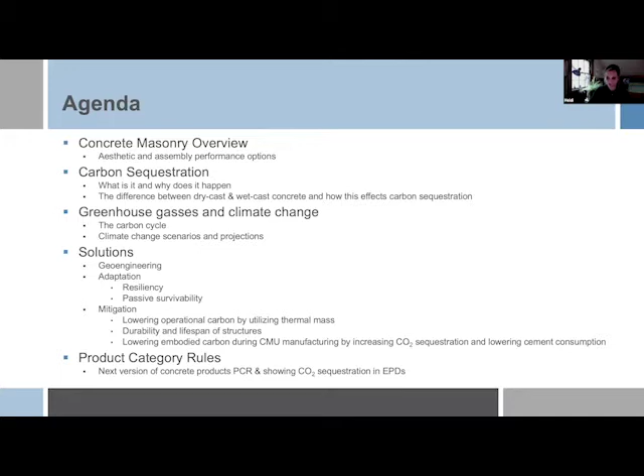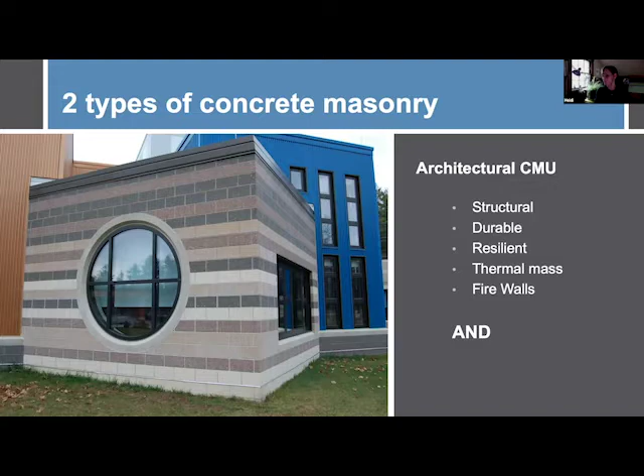For an overview, there are two types of concrete masonry units. We have gray block, which is structural, durable, resilient, has really good thermal mass, and is also used for firewalls. And we also have our architectural CMU, which is very durable. It can be structural or veneers. It's also very resilient, has good thermal mass, and can be used for firewalls. It's also very beautiful, and can be used for both structural and veneers.

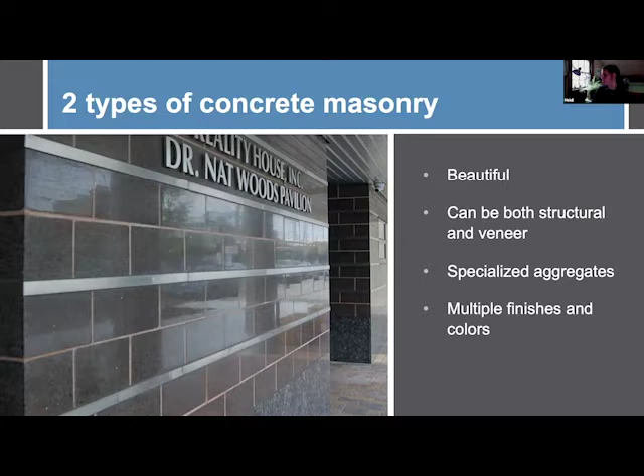We use a lot of specialized aggregates from all over the Northeast, and we have multiple finishes and colors available to us.

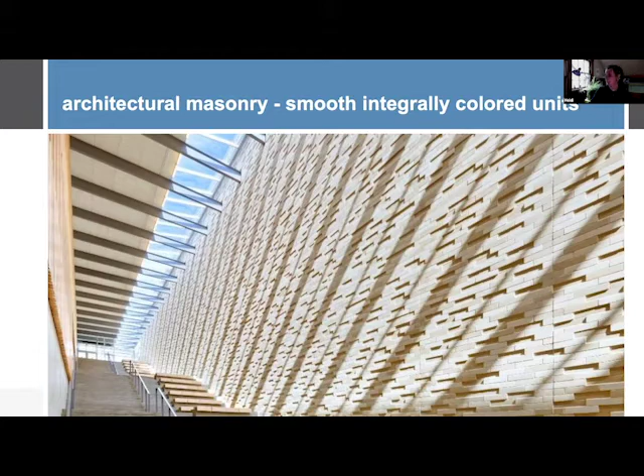And then we have a weathered or textured polished CMU, which is a similar process to polish, but it almost scoops out the concrete behind the aggregate and then shines up the aggregate, so it almost has a leathery kind of feel to it.

For our wall types, we have a multi-wythe cavity wall. This is usually an 8-inch block backup. We have room for insulation and then some sort of veneer. It can be, in this case, a smooth face CMU, but it can be brick, ground face, or polished.

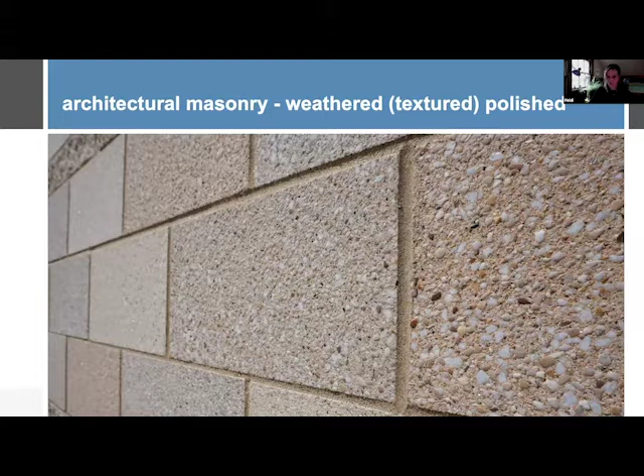Here we also have our pre-insulated single wythe wall. This is a single block unit, usually with a different type of shape. Like in this case, we have one web and the insulation inside the unit so that it conforms to current energy codes. On the right, we have our anchored veneer, which is usually a steel backup, and in this case we see a ground face veneer. We probably do about 60% of what we manufacture at our plant for this kind of wall structure, being the anchored veneer.

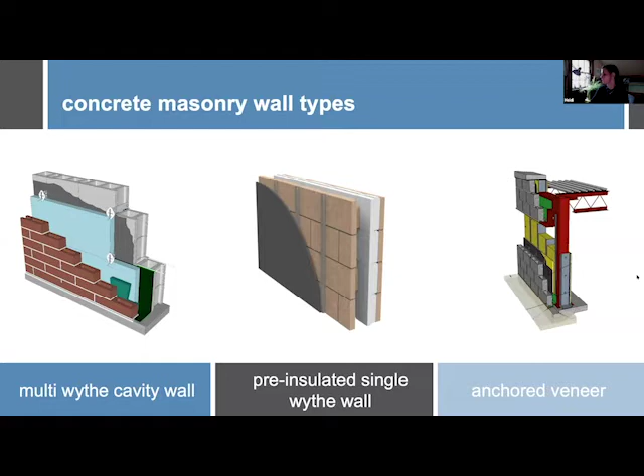So carbon sequestration, what is it and why does it happen? It's traditionally been called carbonation, which is well known within the industry. It's part of the reason that concrete gets hard, and part of the reason that concrete shrinks.

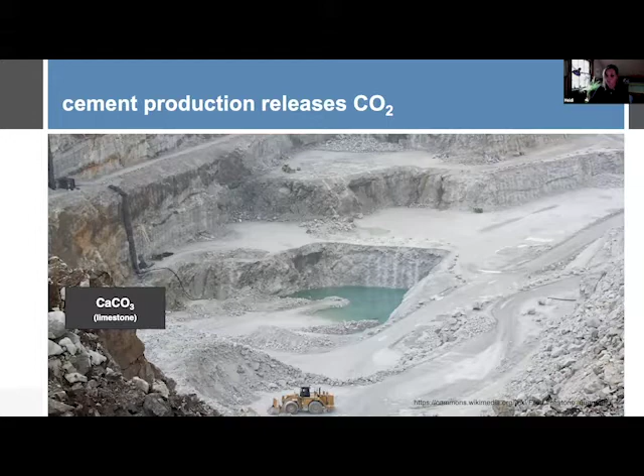So why does it happen? I'm going to go a little bit into cement production. When cement is being produced, CaCO3, which is limestone, is taken out of the quarry. It is heated up to about 2,000 degrees in this large rotary kiln. This heat causes a chemical reaction, and for quick and easy numbers, approximately 45% of the CO2 released for cement production is due to the energy used to heat up this limestone.

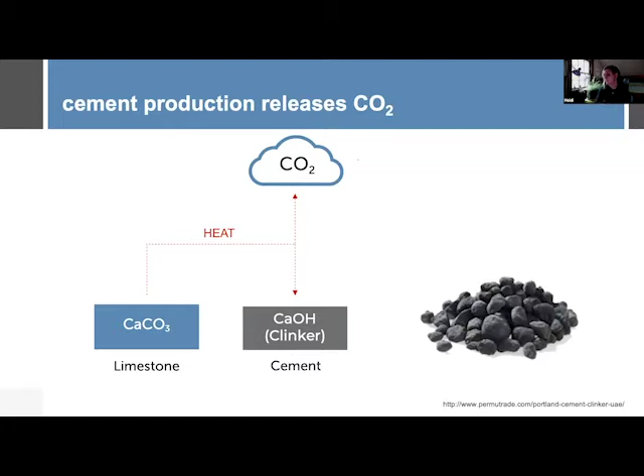So when the limestone is heated up, it breaks apart chemically and CO2 is released. What is left is our CaOH, which is also what was called clinker. This clinker is then ground up and powdered, and that is where our cement powder comes from.

But when water and aggregate are combined with the cement, it produces concrete. So from the moment concrete is produced, it begins to reverse the chemical reaction that originally released the CO2, and it begins to sequester CO2 from the environment. The sequestered CO2 is chemically combined permanently back into the matrix of the concrete as nanoparticles of limestone.

This has historically been called carbonation, like I mentioned, and about 40 to 50 years ago it was studied extensively due to corrosion issues with rebar in concrete, because as it carbonates, its pH decreases. So corrosion protection requirements for masonry and concrete have been figured out for the most part and are part of the building code requirements that haven't changed for about 50 years. But studying and researching carbonation, AKA carbon sequestration for environmental reasons, is fairly new territory within the industry.

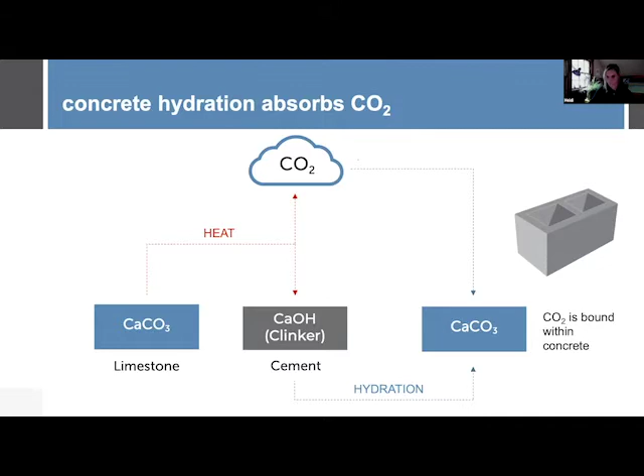So I'm going to go into some of the similarities between dry cast and wet cast concrete. The raw materials are basically the same, but with different ratios. Dry cast, which is what concrete masonry, concrete block is, generally uses a different gradation of aggregates. It uses less water and much less cement than wet cast concrete, which would be the same as ready mix or poured in place concrete.

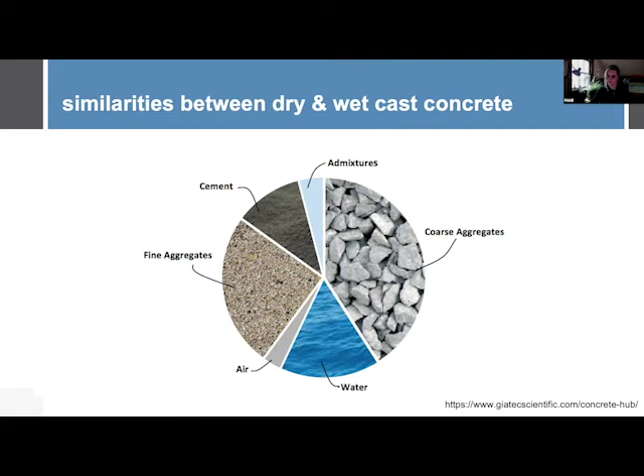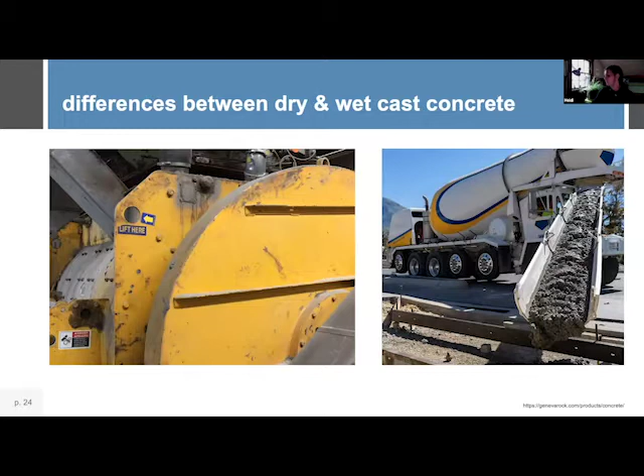So on the left we have a block machine, and this is our mixer. All of our raw materials are put into the mixer with a very, very small amount of water. On our right we have our poured-in-place mixer, so it all happens here and then it just gets poured right into the ground. That's kind of the end of it.

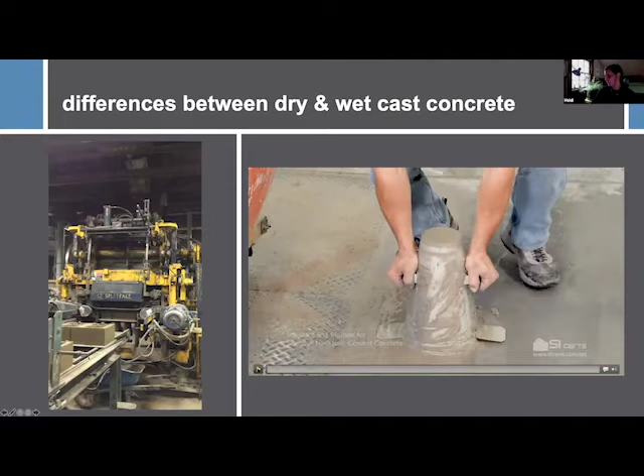Where dry cast, here I have a video of our block plant. Dry cast is also zero slump, so there's very little water in it. From the mixer, the concrete gets poured down into the machine, and it's actually vibrating. Once the block comes out, if I were to grab this, that's why we call it zero slump. The difference here is that slump concrete has got a lot of water content in it.

And that water content is very important for the strength also. So here's a little video of a slump concrete.

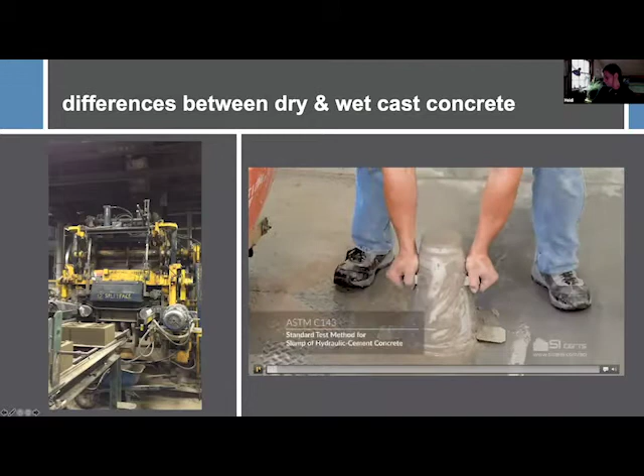We'll invert the cone, measure down to the offset center, and get your reading for your slump.

So because of this difference in slump and therefore water content, dry cast concrete has a unique structure that helps to facilitate accelerated CO2 sequestration when compared to poured-in-place concrete, which we're going to get to in a little bit.

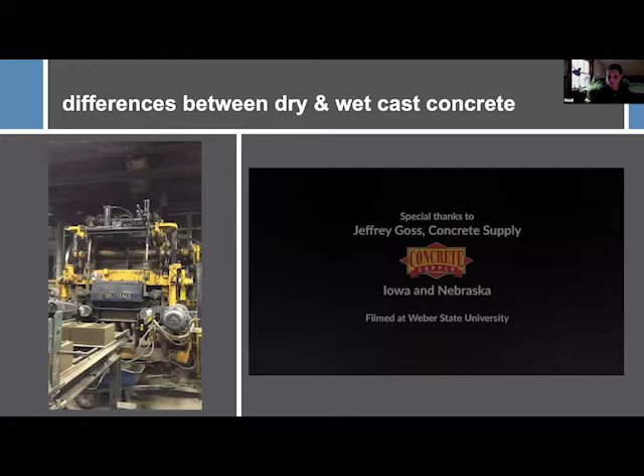Another one of the main differences between dry cast and wet cast is that we use a kiln. The kiln isn't all that hot, it's probably only about 140 degrees, depending on the mix. But essentially the reason for using this is to cure the concrete, to give it a jump start, starting the hydration process.

And that's another way that we gain our strength. The first way is with the vibration and compaction of the machine - that's one way we gain our strength, and also the curing. So dry cast is not completely dependent on cement content to gain our strength; there are other parts of the manufacturing process.

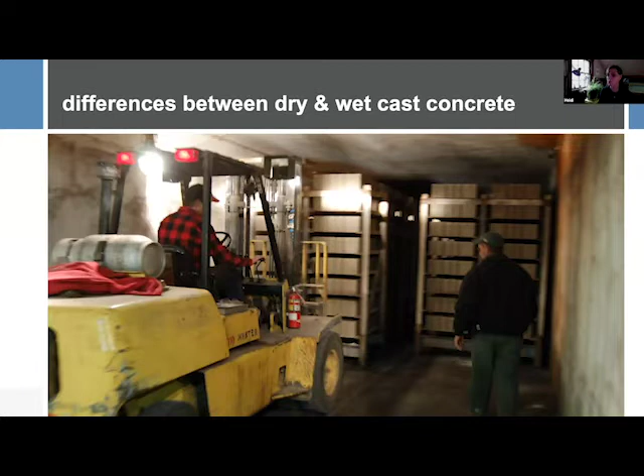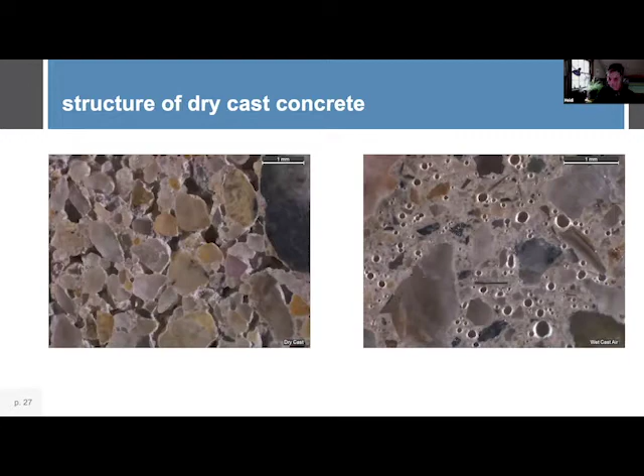So because of this structure of concrete block, ASTM C90 has absorption limits. If the block conforms to C90 and it's properly flashed, weeped, and has crack control detailed properly, moisture won't be an issue with concrete masonry construction.

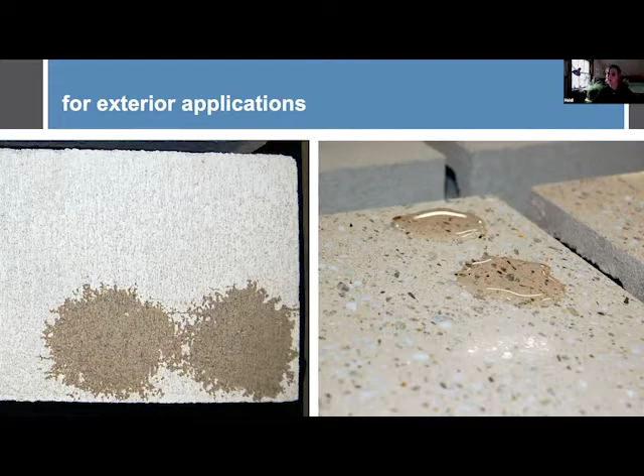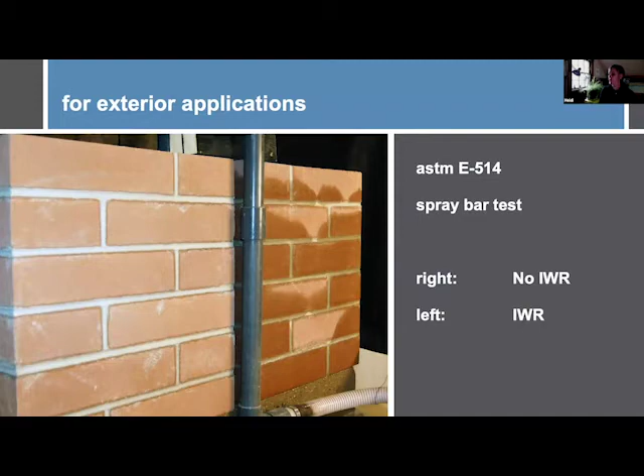Another test for water repellency is our ASTM E514, which is a spray bar test. The block on the right had no integral water repellent, and on the left it did, also in the mortar. You can see that over time, water starts seeping in if it doesn't have the integral water repellent.

So back to the void structure - because of the more porous structure of dry cast, we have to control water penetration with CMU construction. But all that surface area and void structure produces kind of like a carbon dioxide sponge.

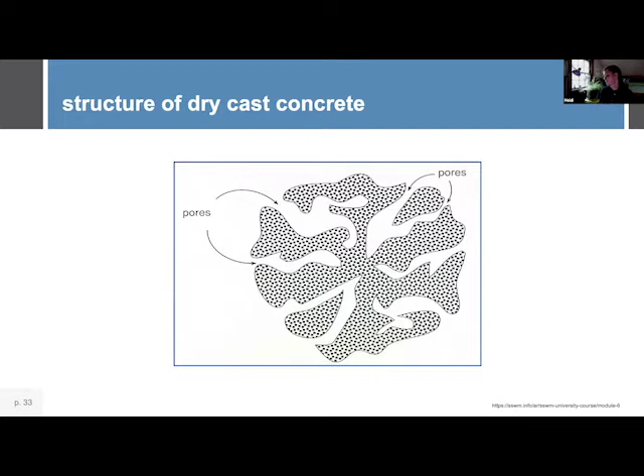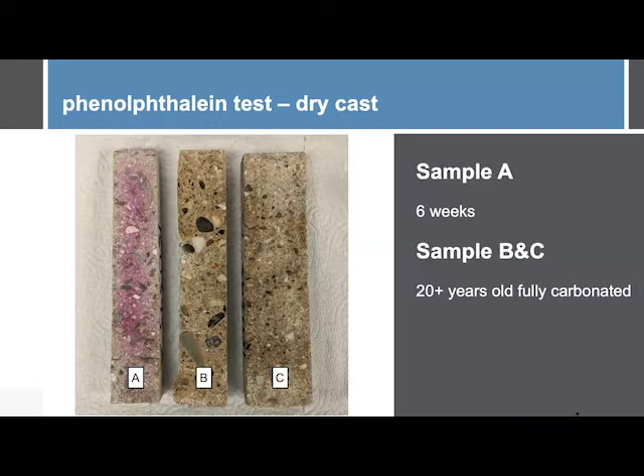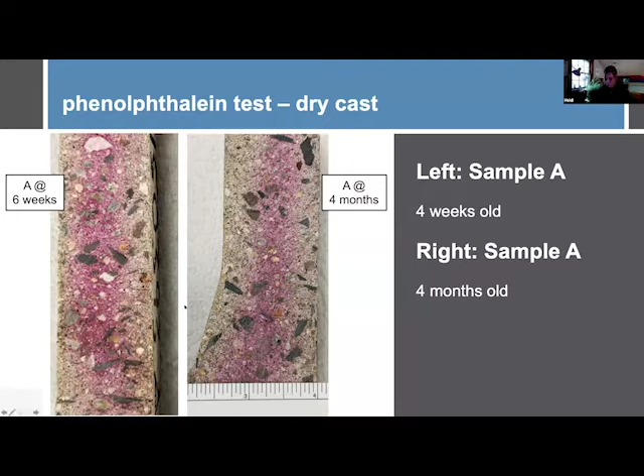So the sequestration potential, about 40... and these are very, very rough numbers. About 45% of CO2 emissions is due to the heating, 45% due to chemical reaction, and 10% to other processes of manufacturing.

The CO2 emissions due to heating and other processing can be improved with increased efficiencies. For example, Heidelberg Cement Company, in their 2019 sustainability report, reported a reduction in CO2 emissions by 22% since 1990, and they have a goal of 30%, so that's substantial.

So increased efficiency of the cement plants will help to shrink the CO2 emissions given off by the energy that it takes to make the cement. But the CO2 released due to the chemical breaking apart of limestone won't be affected by these efficiencies. However, we can potentially get a good portion of this back through sequestration and using technologies to increase sequestration rates.

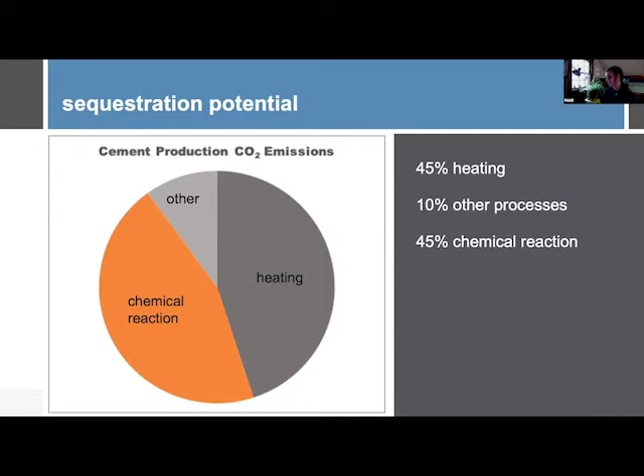Here we have this 20-plus-year-old block, and it was 25 to 28% sequestered CO2, which uses up another huge chunk of the potential.

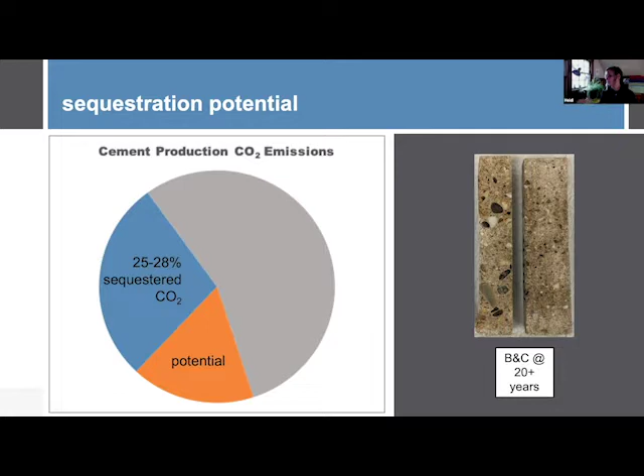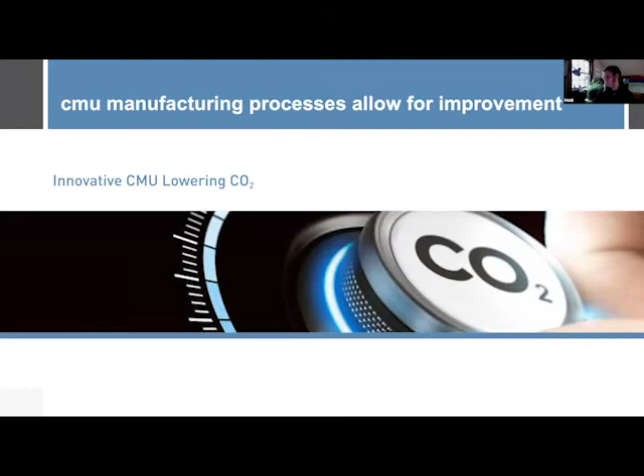So what about the remaining? How about that? This is another current area of study and research that we've been working on at our plant, how to get the most sequestration possible by changing the way we manufacture and our raw materials. Our first testing is at 28 days, but we're also looking beyond the 28 days. I'm going to talk a little bit about some of the manufacturing process improvements, but that'll be more further on. I will say that we have been researching technologies to increase the amount of CO2 sequestration at 28 days.

So why 28 days? Well, first of all, this would be considered cradle to gate for our EPDs, which are currently cradle to gate. And it's also when we no longer have control over what happens with the CMU. Is it covered with non-breathable paint? We don't know. Covered with insulation? Probably. Put in the ground? Very good possibility. We just don't know. So as a manufacturer, kind of in the beginning of this research, we can't really worry too much more about beyond 28 days, even though we know it continues to sequester if it's in the right conditions.

So one of the technologies we've been working on increases the reactivity of the cement we use. This not only lowers the amount of cement we need to use, which is huge for global warming potential—which I'll show you when I show you our EPD results—but also, because it's more reactive, it increases the sequestration of ambient CO2.

Another technology we've been using injects CO2 into the mixer during production to increase the rates. I'll get into this a little bit deeper further on in the presentation.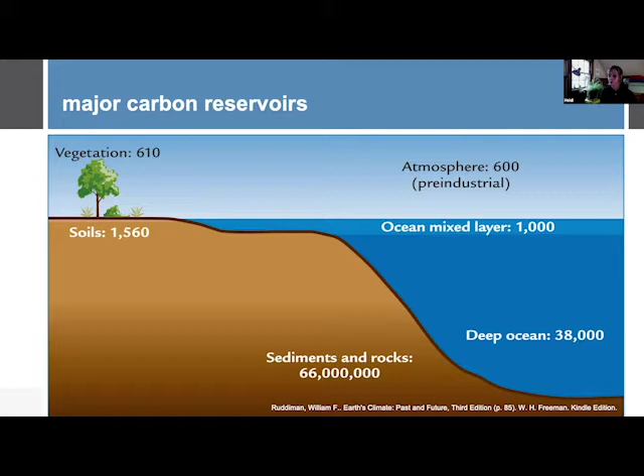So I'm going to get into greenhouse gases and climate change, starting with the carbon cycle. The largest reservoir of carbon in gigatons on Earth lies in its sediment, and this includes fossil fuels and rocks, not in its atmosphere, vegetation, or ocean. Over intervals of millions of years, slow exchanges between the rock and surface reservoirs can cause large changes in atmospheric CO2 levels. So we have our very slow carbon cycle in the atmosphere down into the ocean, into the rocks, and also our shorter carbon cycles from vegetation into the soil and into the atmosphere.

So the input of CO2 into the atmosphere naturally is through volcanoes. The rock in the earth gets heated up and it spews out of volcanoes, blowing CO2 up into the air, releasing all those gases—also hot springs such as Yellowstone National Park. For this to happen, it requires high heat, which should sound familiar, as I explained how cement is produced and releases CO2 with high heat.

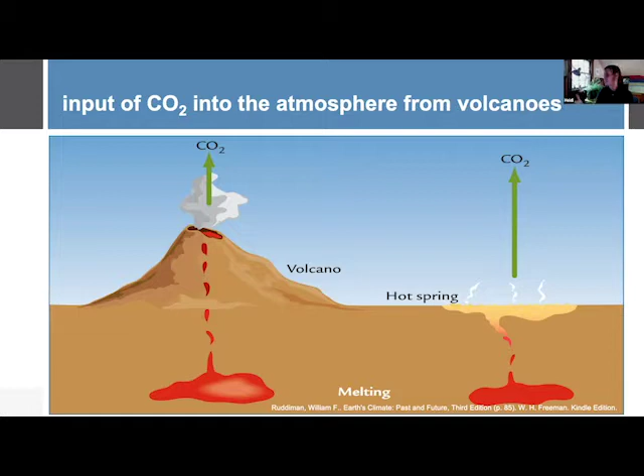The chemical weathering of silica-rich rocks on the continents removes CO2 from the atmosphere. It's dissolved into the carbonate below the ground and gets stored underneath the ground—I remember visiting a cave and seeing stalactites and stalagmites, so that's one of the ways. Also, ions are dissolved in river water and transported into the oceans. From there, little animals make their shells using the calcium carbonate, and it sequesters the CO2 out of the atmosphere. These animals eventually die and go to the bottom of the ocean, and when the plates cover over themselves, they bring it back into the earth, and then it goes back up in volcanoes. That's the larger carbon cycle.

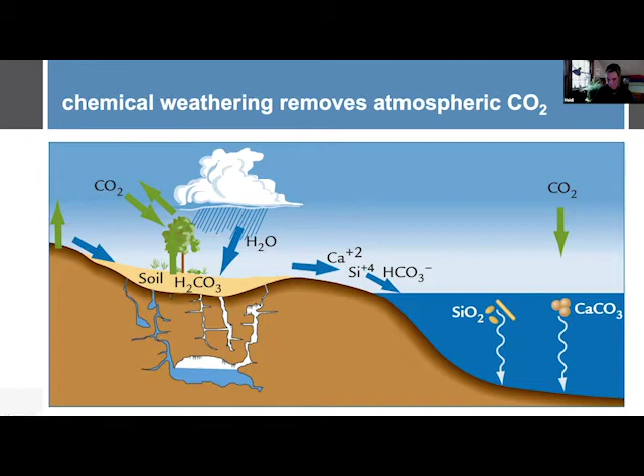This is all part of feedback loops that have regulated climate on Earth for billions of years. At the onset of a warming trend, increased temperatures and precipitation increase chemical weathering, which increases CO2 removal from the environment. In the same way, a colder climate with decreased temperature and precipitation decreases that chemical weathering, stopping CO2 removal and reducing the initial cooling. So it's all part of this amazing Earth that we have, this living system that regulates itself. Left alone, the Earth would absolutely regulate itself.

But the problem is, pretty frankly, is us. We have been pumping out CO2 faster than the Earth can regulate or even pump out on its own.

These data points, initially published in the Nature Research Journal in 1999, were collected from Antarctica ice cores, which reconstruct the temperature and greenhouse gas correlations over the last 425,000 years. Correlations between temperature anomalies and atmospheric CO2 show that temperatures slowly rise as CO2 levels in the atmosphere rise. CO2 levels are shown in blue and temperature in gray. As CO2 levels sharply fall, the temperature also sharply falls.

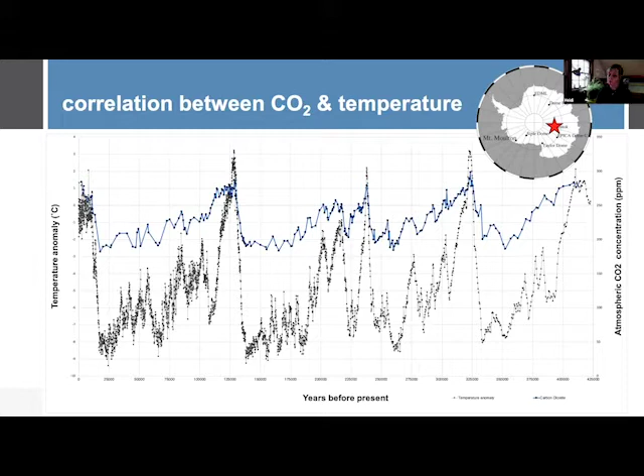While this correlation is well documented, temperature changes and climate variability are caused not only by CO2 concentrations. There are several other natural forcings such as solar activity, volcanic activity, dust, and vapor in the atmosphere. This vapor acts as a greenhouse gas, which also affects global temperatures. But the key word here is natural.

The difference now, in the last 100 years or so, is that we are spewing out more CO2 into the environment at a quicker rate than any natural forcing could do.

Since the Industrial Revolution, our CO2 levels and temperatures are rising much faster than they did during the last extreme greenhouse climate, called the PETM, standing for Paleocene-Eocene Thermal Maximum, which was roughly 55 million years ago and lasted about 100,000 years. This interval was characterized by the highest global temperatures from the Cenozoic era until present. It took thousands of years for temperatures to rise this much, and our current CO2 levels are rising much faster than they did leading up to the PETM.

We aren't at the atmospheric CO2 levels yet that were seen at the PETM, but we're headed there very quickly. At the beginning of the PETM, the Earth was already relatively warm, much warmer than it is now, so we've got to give it that.

There were no polar ice caps at the start of the PETM. Temperatures rose from 5 to 8 degrees Celsius, making the temperatures at the poles 74 degrees Fahrenheit, and the ocean waters 68 degrees Fahrenheit. This was an extreme warming which occurred after an extreme release of carbon dioxide, methane, and other greenhouse gases.

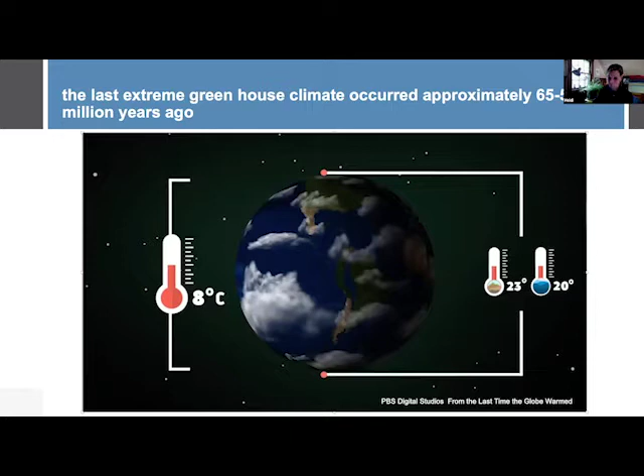One thing we do know is that during the PETM, fossil evidence has been found in the Arctic Circle for ferns, ginkgos, and redwoods. Fossils can also be found of alligators, crocodiles, and turtles as far north as the polar forests of northern Canada. During this time, the globe had warmed more than humans had seen up until that point.

It shows how extreme the effects of climate change can be, and it allows for some pretty striking comparisons.

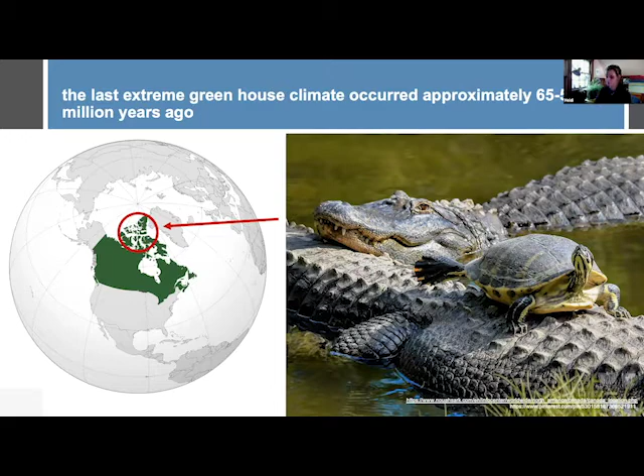Going into projections: the IPCC, the Intergovernmental Panel on Climate Change, developed a series of scenarios for greenhouse gas emissions. In dark blue, we have the actual CO2 emissions, which is a jumping off point for all four scenarios, called RCPs, standing for Representative Concentration Pathways.

RCP 8.5, shown in pink, is a scenario with very high emissions. 6.0 is also very high, but not as high as 8.5. 4.5, in blue, is an intermediate greenhouse gas mitigation scenario. And 2.6 is very stringent mitigation—this is what could happen if we really got it together quickly.

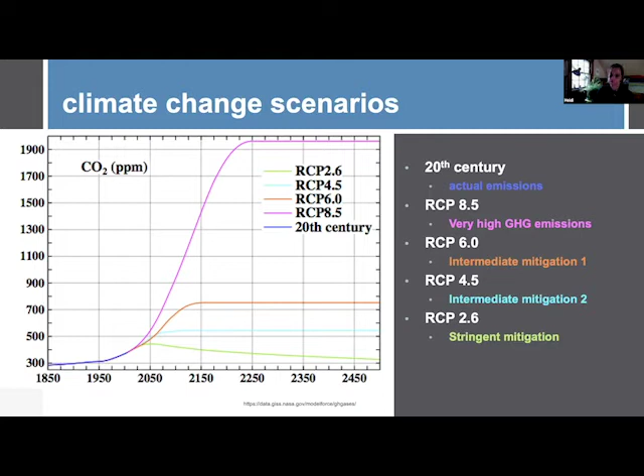Scenarios without any additional effort to constrain current emissions lead to pathways somewhere in between these. We're going to look at a climate model which takes data from scenario 4.5, an intermediate to fairly drastic lowering of CO2 emissions, and I'm going to look at a period from 2000 to 2100.

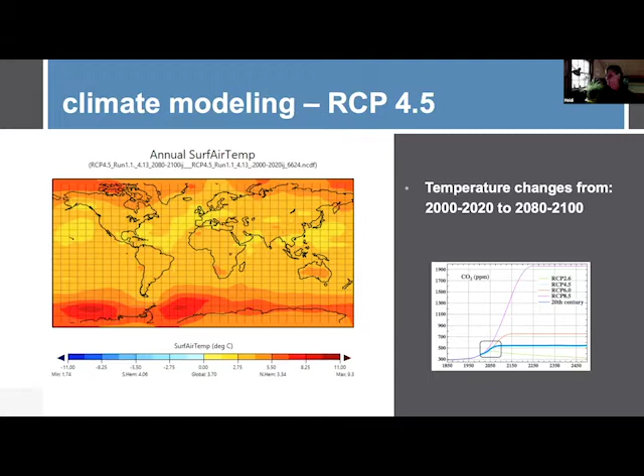Is this enough to bring alligators back to the Arctic? Probably not, but you can see where this is headed if we don't get it together.

So, global emissions by sector. Building materials and construction accounts for 11% of CO2 emissions, according to Architecture 2030.

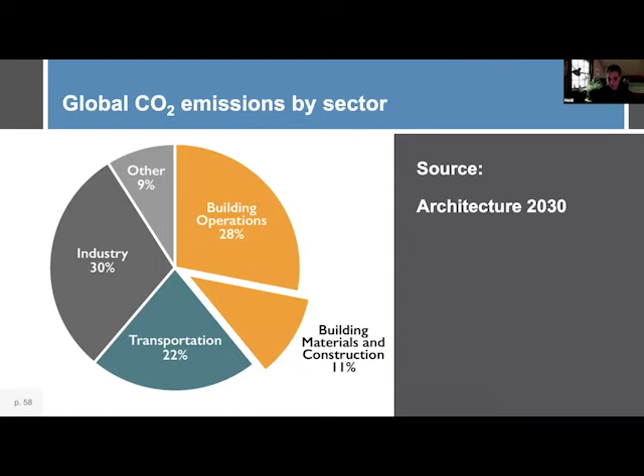Now I'm going to go into solutions. These solutions are geoengineering, adaptation, mitigation, and an integrated approach is needed. Comprehensive risk management includes a family of solutions drawn from all four of these approaches.

This was published in Physics Today back in 2014. We need mitigation, which is reducing emissions; geoengineering, which is introducing changes to counteract emissions; adaptation, which includes planning for impacts, building resiliency, and improving response capacity; and knowledge-base expansion, which is scientific assessments and technological developments.

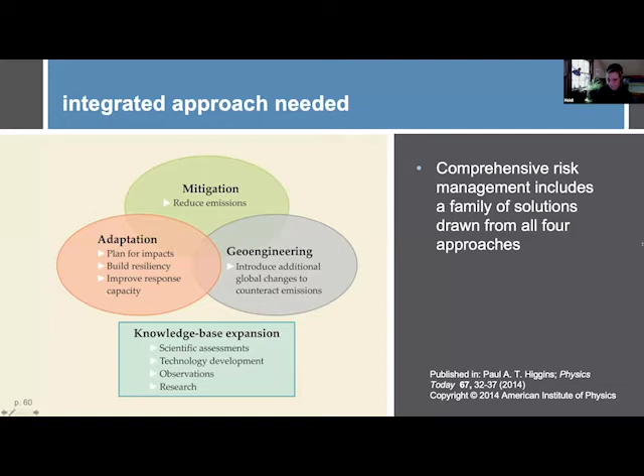First I'm going to talk about geoengineering, not because I think it's the most important. I just wanted to get it out there, and doing it first flows with the presentation better than bringing it in at the end. There are many different geoengineering solutions out there, but they vary in effectiveness, cost, and risk.

Sorry, I have jumpy fingers. What's going on? Sorry, let's go back. Wow, that really got jumpy. All right, found it, apologize for that. My mouse pad migrated over to my keyboard and had a little mischief going on.

Geoengineering solutions that do not negatively affect the Earth system as a whole are required to keep the Earth from entering this greenhouse climate. Several solutions would be needed, but they need to work economically and ecologically. There's several proposals out there, but not all of them make sense.

Mirrors in space are way too costly, and they have very questionable efficacy. It would be like hanging mirrors in the sky reflecting solar radiation. Maybe we could hang them on the clouds, perhaps. I don't know.

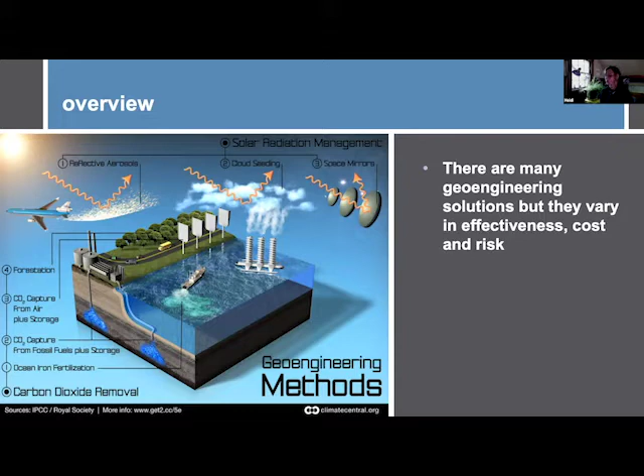Different types of trees hold different amounts of carbon in the soil. On this image from the USDA website, trees from tropical forests are estimated to hold much more than 50% of their carbon in the actual trees, with the rest in the soil. Trees from the boreal forest up in Canada hold as little as 5% in the actual tree, with the rest locked up in the soil.

The wetlands and the peatlands, absent of human intervention, will largely remain as carbon stores.

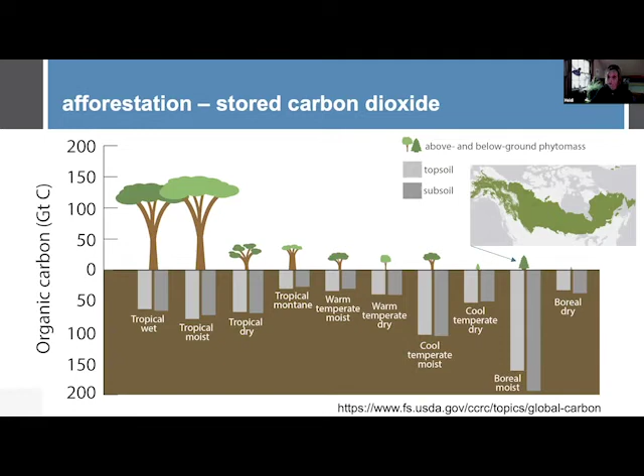So then we get to carbon capture. It seems to have the most promise. Not only can it create a carbon neutral fuel for the transportation industry, it could also capture CO2 out of the atmosphere and solidify it for storage.

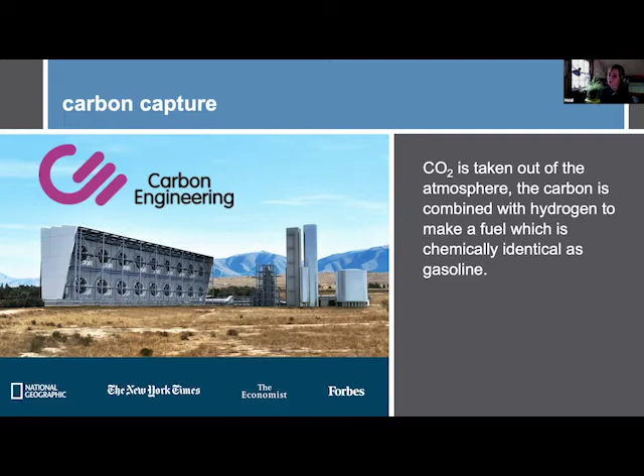The Wall Street Journal reported on February 12th, 2020, that Exxon Mobil, Chevron, Microsoft and other big corporations are focused on reducing the cost and energy required to capture carbon dioxide. Hopefully with this group of large corporations working together on this, it'll soon become common practice.

Adaptation, plan for impact and build resiliency. In most parts of the country, there's natural disasters.

This was after Superstorm Sandy in 2012. This was an interview I heard on NPR, and I looked it up from 2012. The only thing we can do, insurers say, is build our buildings safer and better prepare for what will eventually come.

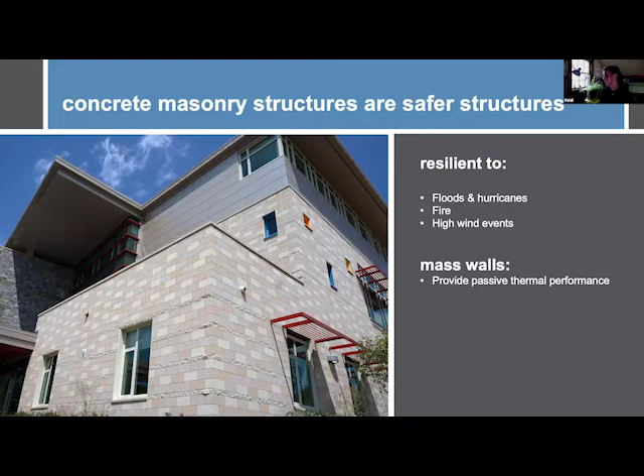So concrete masonry structures are safer structures. They're very resilient to floods and hurricanes, to fire, high wind events, and mass walls provide passive thermal performance. It's considered to be a Class 5 building material by FEMA. It's highly resistant to flood and water damage, including damage by moving water. These materials can be successfully cleaned and rendered free of harmful pollutants. The IBC requires the use of flood damage resistant materials in areas prone to flooding.

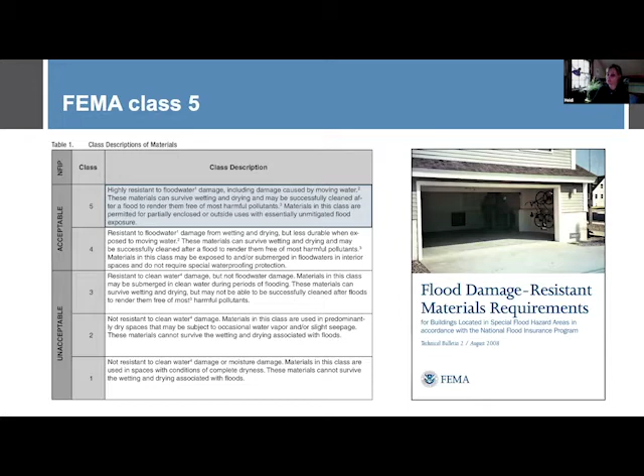This is Superstorm Sandy again, 2012. This is actually from my old neighborhood in Red Hook. I used to live in Red Hook, Brooklyn, and this whole area flooded. Because these are masonry structures and very resilient, this is a Google Earth image from 2018. So this community could rebuild and thrive, and businesses didn't have to leave.

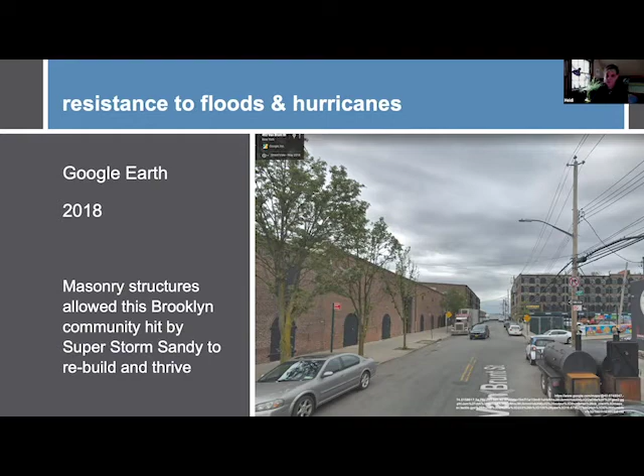Another thing, resistance to fire: it's non-combustible, it remains structural under fire conditions. There are two types of systems. There are passive systems, which is non-combustible and compartmentalization. And then active systems would be what sprinklers are.

This is an interesting video on YouTube. If you Google legacy room, modern room, and UL laboratories, you can watch this video. I'm going to go through it pretty quick, but something that's pretty sobering is in recent history, fire codes have become more and more dependent on active systems being sprinklers, allowing for more structures to be made of combustible materials. At the same time, fuel loads in our living rooms have increased by about 10 times.

This legacy room on the left is from about 100 years ago. The furnishings are wool, horsehair, cotton, very traditional. Modern is plastic furniture, pleather, foam padding, very little natural materials. This makes for a very combustible room. Plastic is a derivative of oil, which is a fuel, and plastics give off a vapor which is combustible at high temperatures during off-gassing.

So let's start this going, and I am going to fast forward it for the important points. Synthetic materials today have about 3 times the BTUs compared to traditional materials, and houses also have about 3 times the amount of stuff inside that they used to. This means about 10 times the fuel in modern homes versus traditional legacy homes. Just one recliner has enough to flash a room.

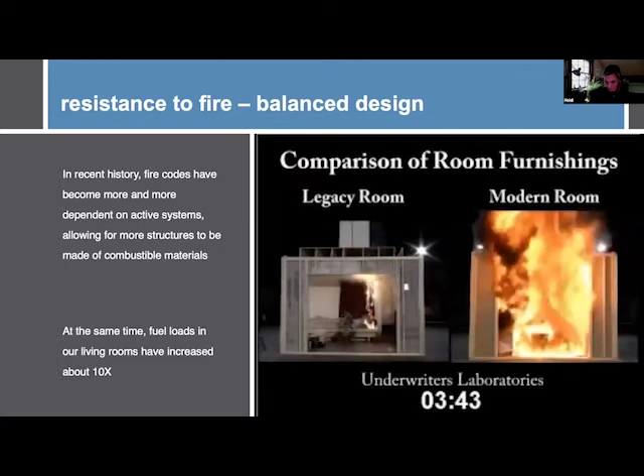So the modern room flashes at about 3.5 minutes, and the legacy room flashes at 29 minutes if we were to continue on with this video. Fire resistance and non-combustibility is a big part of resiliency.

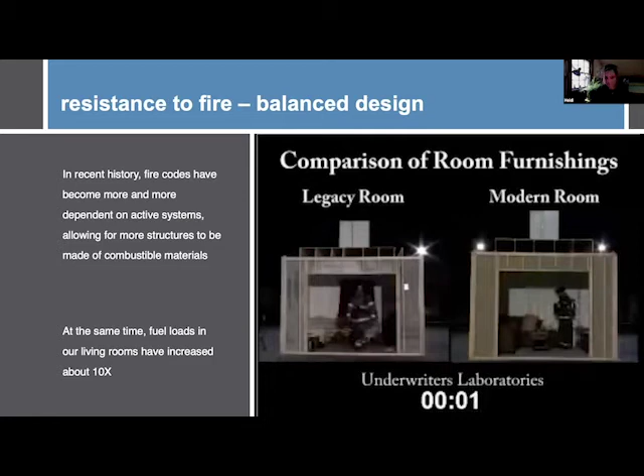Now I'm going to go on to passive survivability. Here is a graph showing in green mass walls and the interior temperature of a mass wall structure versus the interior temperature of a light frame structure. In blue, we have the exterior temperature. You can see that with mass walls, they really hold the temperature, where a light frame structure just stays very much the same as what's going on outside.

Following a natural disaster, it might be days or weeks before power is restored, and mass walls can really help with the passive survivability of a structure.

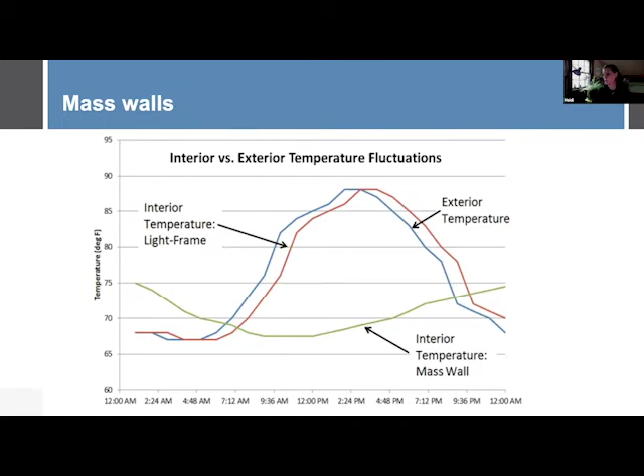Another example of passive thermal performance: this is Marsha's garage, my sister's masonry garage. In the summer, when it got really hot, going into this garage felt about 20 degrees cooler. So you can really feel that thermal mass.

Believe it or not, I grew up in an almost 100% block house—block stairs, block floors, block walls, everything. We needed no air conditioning in the summer just because all that thermal mass really held the temperature. I think my father got the blocks cheap or something.

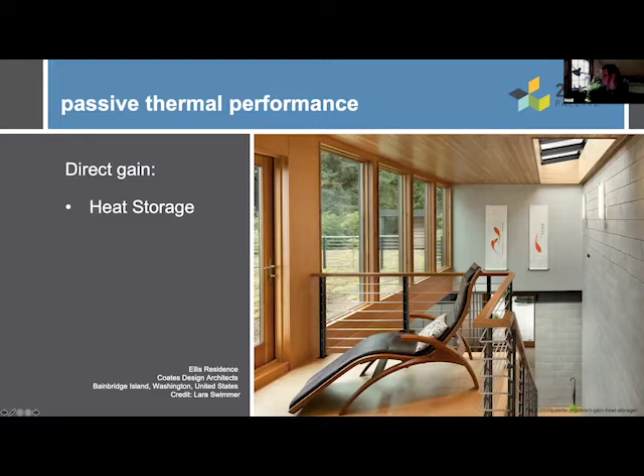So a couple other strategies, from the 2030 Palette: direct gain heat storage, where the wall is designed to absorb solar radiation during the day and release it at night. And a thermal storage wall, designed to absorb solar radiation from the windows and then emit it to the inside of the structure on the other side.

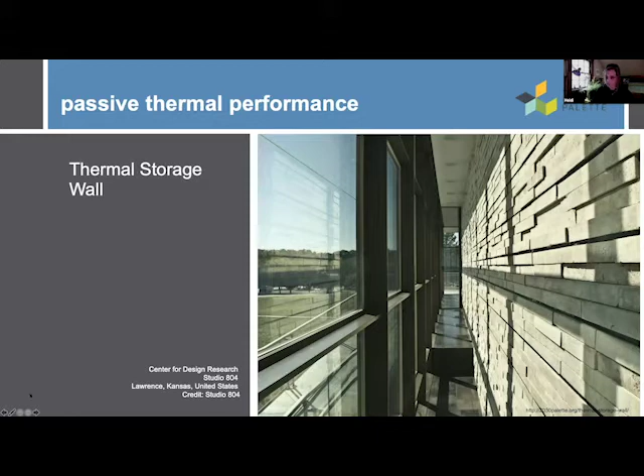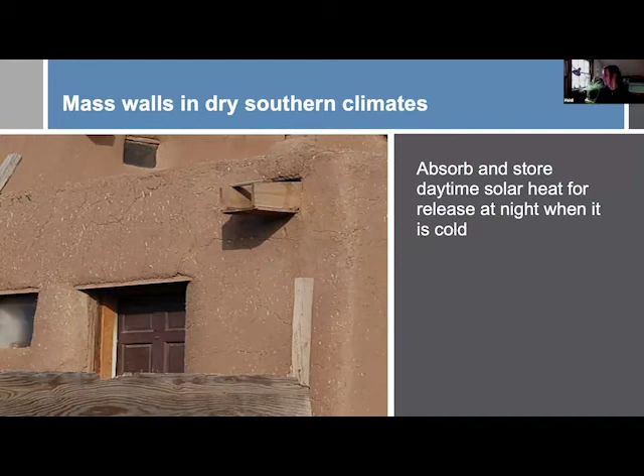Mitigation: reducing emissions by utilizing thermal mass. Mass walls in southern climates absorb and store daytime solar heat for release at night when it's cold. In New England, with cold climates, we can utilize that thermal mass on the inside of the insulation, which absorbs and stores the interior temperature of the conditioned space, minimizing thermal lag—that chart I showed you where the thermal mass keeps a steady temperature. So, a real-world, code-based way to evaluate thermal mass.

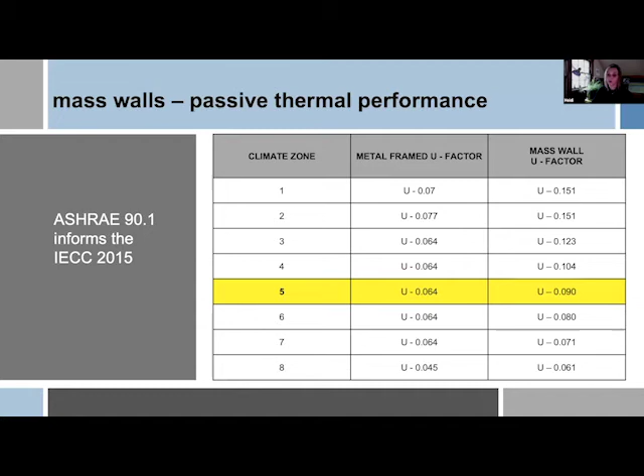This is a table out of ASHRAE, which informs the International Energy Code. For climate zone 5, which is what we are here in Massachusetts, a metal-framed building requires a U-factor of 0.064. A mass wall requires 0.09. So ASHRAE and the Energy Code take into account thermal mass when giving you the requirements to pass code.

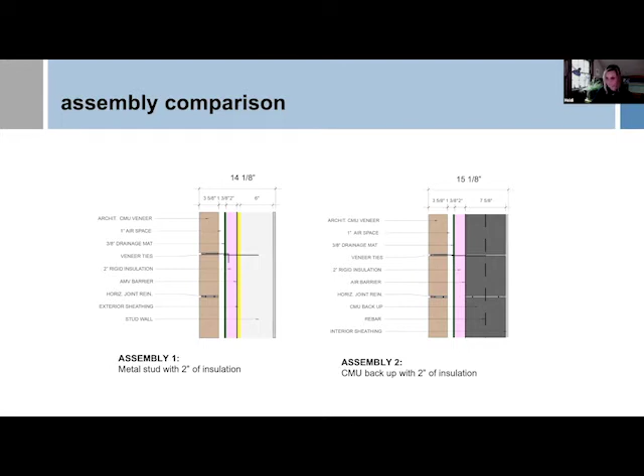Looking at assembly number 1, a metal stud with 2 inches of insulation. On the right, a CMU backup with 2 inches of insulation—so they both have the exact same amount of insulation. The metal frame with 2 inches in climate zone 5 fails code by 14%, whereas the same amount of insulation with a mass wall behind it exceeds code by 36%. So it provides a much more energy-efficient envelope with the same amount of insulation, which allows you to actually use less insulation to pass code.

I am pursuing my Master's of Sustainable Building Systems at Northeastern, and I'm currently in a life cycle analysis course. My overall project is going to compare wall assemblies and take these things into account—using less insulation, utilizing the thermal mass, also taking into account the sequestration of the block. That's my big project, and I can't wait to get into it. I'll let y'all know what I find out.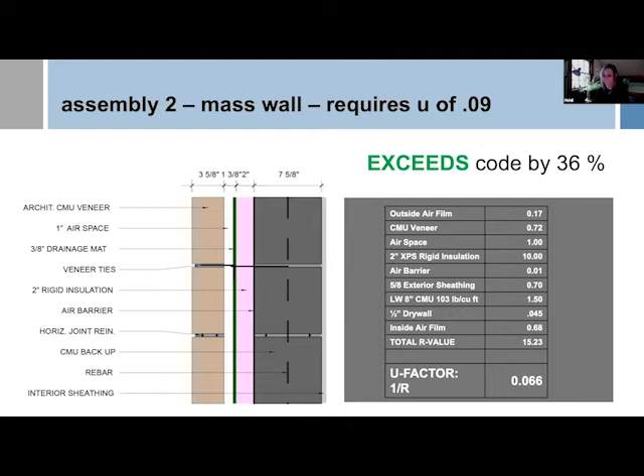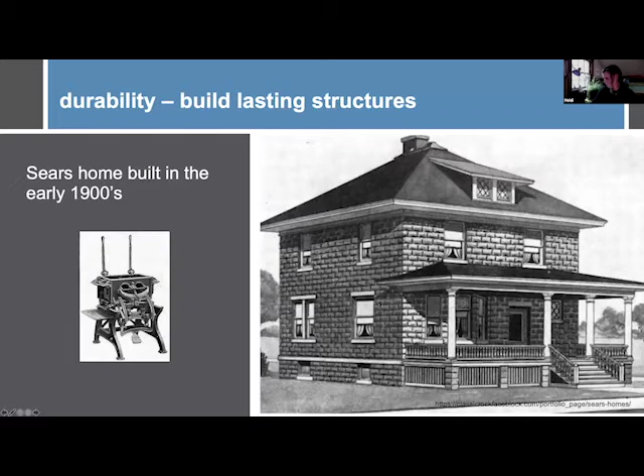Once you start seeing these house types, you start seeing them everywhere—it's kind of like being in a field and seeing one spider, then you start seeing them everywhere. But these structures are well over 100 years old, and most of them are standing up extremely well.

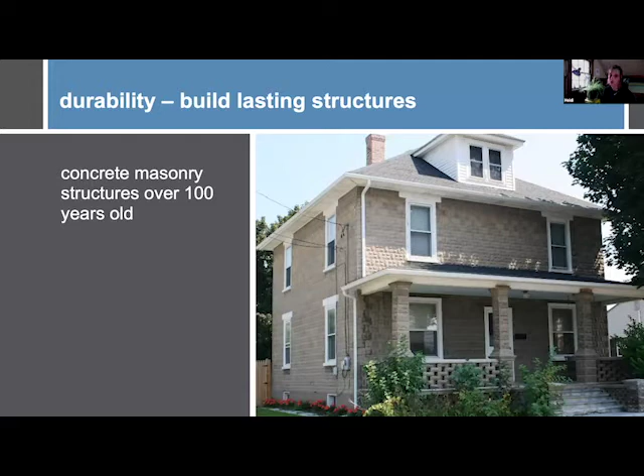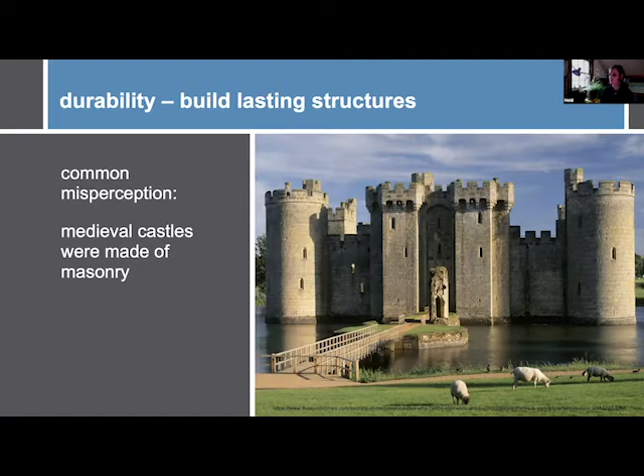I'm going to finish this section with a common misperception. I heard this once at a talk that had nothing to do with architecture, but it was about how you perceive things, and your perceptions aren't always true. The misperception was that medieval castles were built of masonry—everybody thinks these castles are masonry, and masonry lasts forever. But in reality, most medieval castles were made out of wood, and they just aren't around anymore. They did not stand the test of time.

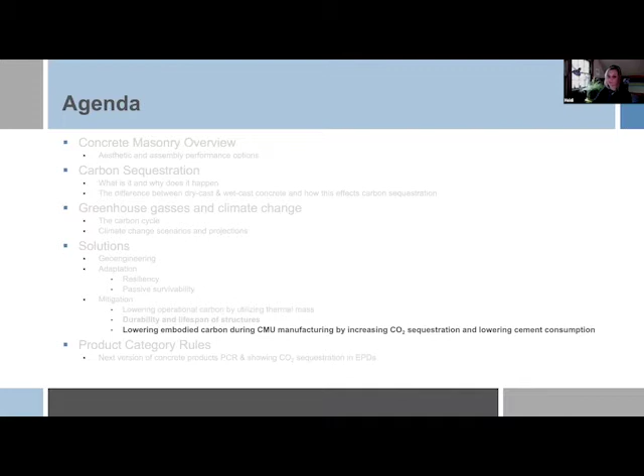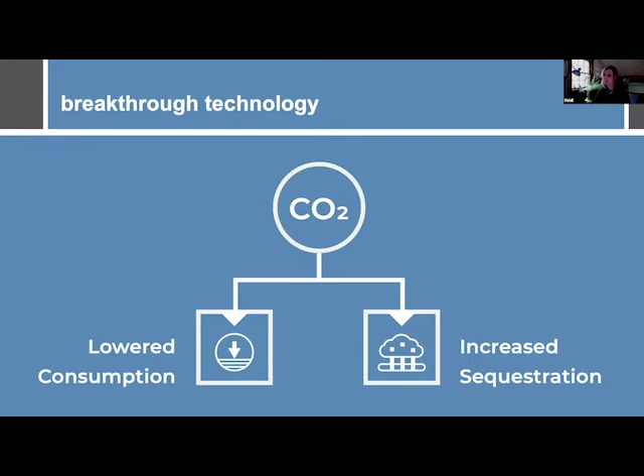This is heightened cement paste reactivity. So what we do is we change the way we manufacture. We make the cement paste more reactive, so we can use less of it, but it also increases the amount of CO2 sequestration, because that cement is actually more reactive. It essentially creates a carbon sink out of the block.

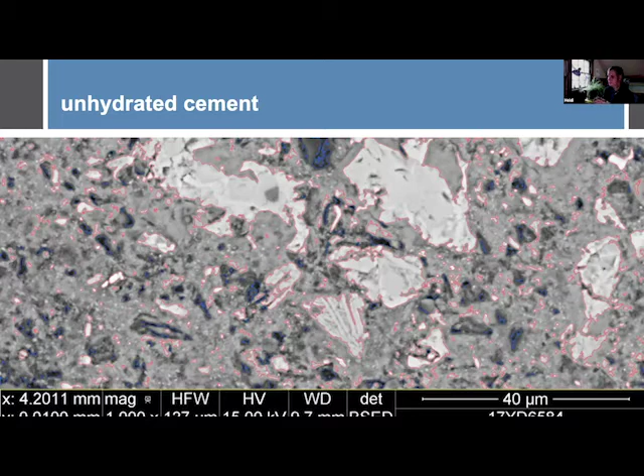These clusters of unhydrated cement form a hard shield around them so that carbon dioxide will never get to them. One of the things this technology does, and the main reason it works, is that it liberates these little clusters during manufacturing and leaves them available to carbonate. This allows us to utilize that unhydrated cement, and this is one of the things that can bring us back to that 45% potential, which was kind of like the top amount we could potentially sequester. Also, because of this, less cement can be used.

Looking at our EPDs, we had environmental product declarations done for every single one of our mix designs. That was about 400 of them, and it was really interesting, some of the things we got from it, like using crushed concrete as an aggregate. We thought we were doing the right thing by having post-consumer recycled content, but actually we found that it brought our global warming potential up, mostly because of the quality of the aggregate.

We had to use more cement, and we weren't saving it from the landfill - it was used as road base, so little things like that we didn't think of. It also showed us a lot about some of our raw materials being much more energy intensive than we would have thought. So it really showed us a lot about our raw material choices.

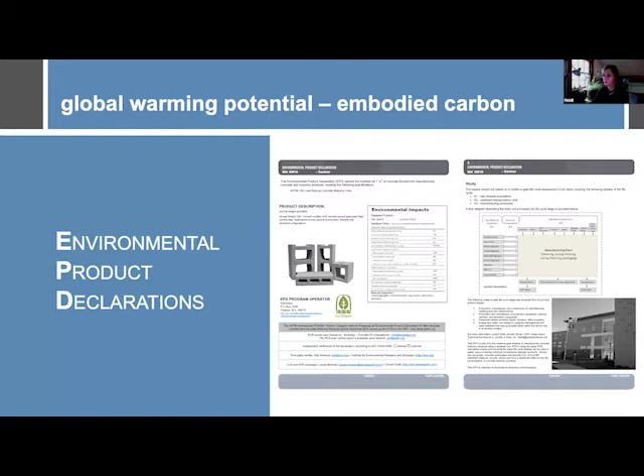Here I have phase one of what we've done with this technology, which is lowering our cement by 10%. And so I have a simulated industry average here. The reason I'm calling it simulated is because it uses our plant data with an industry average mix design, because our industry did not do an industry average, so I kind of made my own, just for myself. I was interested in it, but it's not a true industry average - it kind of gives us a starting point. Here is what our global warming potential is from our normal weight CMU, and then reducing our cement, it brings this down to 261.

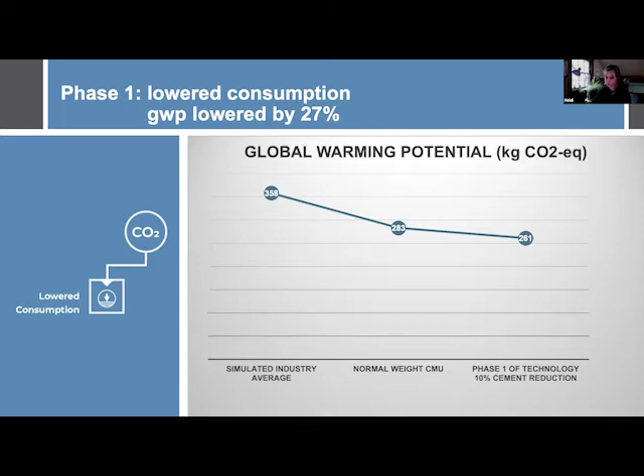Next phase is 10% reduction with 8% sequestration. And then what we're currently working on, and we're not quite there yet but hopefully will be soon with this technology, is 15% cement reduction with 12% sequestration. And this is at 28 days.

So I just want to talk a little bit about these global warming potential numbers. These here are from third-party verified EPDs. And our industry - I mentioned it's simulated because we don't have a current industry average, and I did the best I could for comparison's sake. These here, I calculated the global warming potential using our EPD as a starting point, and then the percentage of sequestration that we got. So these were calculated and are not from EPDs.

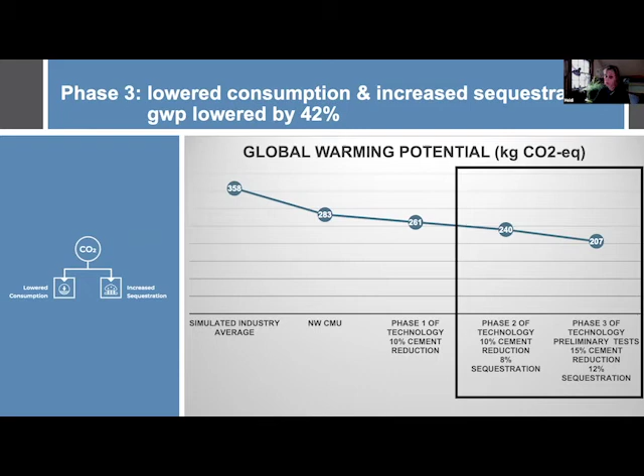But this brings me to the last part of the presentation, which is really exciting.

I've been on the committee developing the PCR for concrete masonry a couple of months ago, and I've been working along with the National Concrete Masonry Association to develop our next PCR, which is product category rules, which is how we conduct our life cycle analysis to get our EPDs.

And we will be showing CO2 sequestration in our EPDs—well, we'll be able to if we have testing. So we will be able to get that credit for sequestration shown in our EPDs, which is really exciting, because it's something we've always known happens, but we just had no way to measure.

So it'll be reflected in the global warming potential impact indicator, and it's going to be 28 days, and it'll be from cradle to gate, accounting for the reaction of atmospheric carbon dioxide. It's going to be for manufactured concrete products, which includes pavers and adhered veneers, and it'll follow the ISO standard 21930.

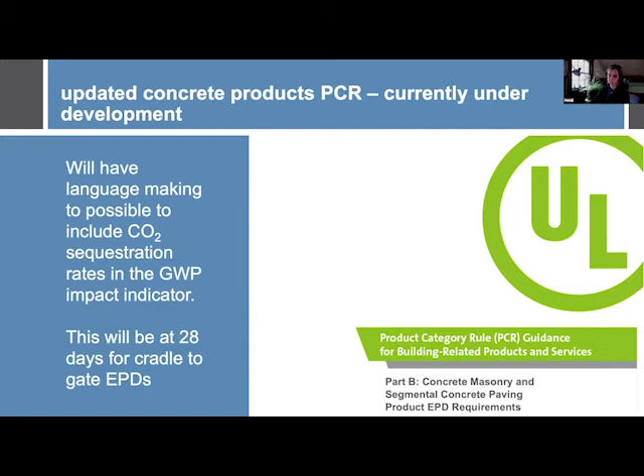So what's next? Utilizing methods for CO2 injection to increase sequestration rates, utilizing technology to increase cement reactivity, which increases sequestration and lowers our cement consumption, and also improvements to our manufacturing process.

We've done a lot in the last 12 to 15 years. We recycle the heat given off by the hydration in our kilns—we're able to recycle that to heat the kilns. By putting that system in, we're able to lower our fuel emissions to heat the kilns by about 50%. That was done about 12 years ago.

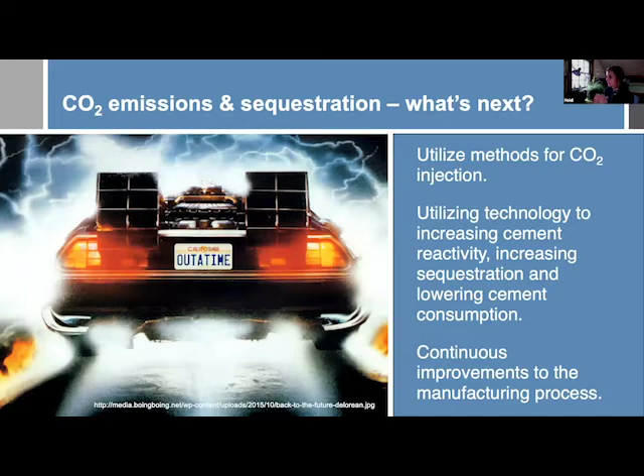We have solar panels. We get about, on average, 80% of the electricity required to run a block machine with the solar panels. We have many other things that we've been working on, but that's my presentation, and we can open it up for Q&A.